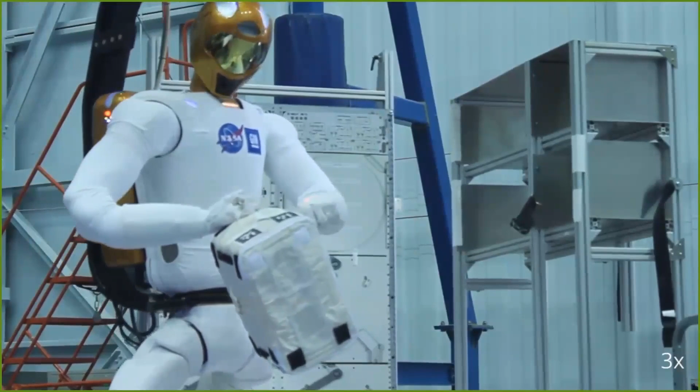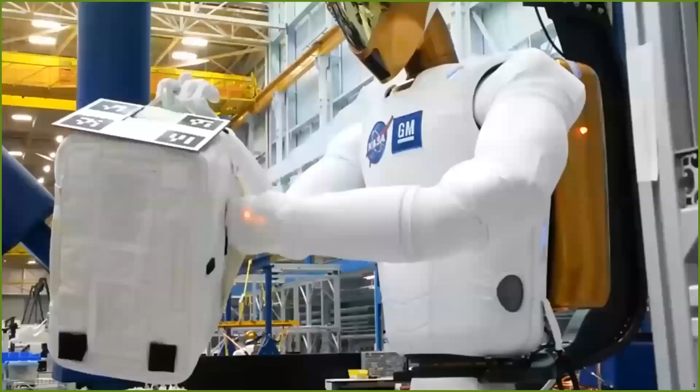So R2 is a dexterous humanoid-ish robot minus the legs that was designed as a prototype for these kinds of intravehicular operations, so inside the ISS. It can clamber across handrails, walk around, and theoretically it can mechanically do anything that you might want an astronaut to do. So R2 is also a really interesting case for motion planning because it is a high-dimensional system, it's humanoid, but we don't have to worry about gravity. So we can make a lot of simplifying geometric assumptions since we don't have to worry about things like dynamic stability.

Moreover, R2 lives in these really claustrophobic modules that are cluttered with all kinds of junk. There's obstacles all lying around. And say we had some tasks that we wanted R2 to accomplish, like maybe walk across the ISS, get from one side to the other. So you can see already that there's going to be a lot of challenges here in order to make that

happen. So the first step of this problem is figuring out how we can even go and then reach another handrail. And so watch carefully. So here you can see that finding a feasible motion for R2 here, which is constrained to not just keep its leg end effector grasped to the handrail, it's also constrained to keep its waist upright facing forward because it's actually kind of a nice proxy for momentum constraints.

The point of this is that solving for this problem requires solving for a motion plan in the presence of a manifold constraint. And so to this end, I'll be talking about that framework for manifold constraint sampling-based planning that Andreas talked about before. The way this framework works is that it decouples the way that these manifold constraints are actually handled from the planning, the search methodology, the way that some specific sampling-based planner explores or exploits the space. And this allows us to use specialized planners that are nice for high-dimensional systems, such as R2.

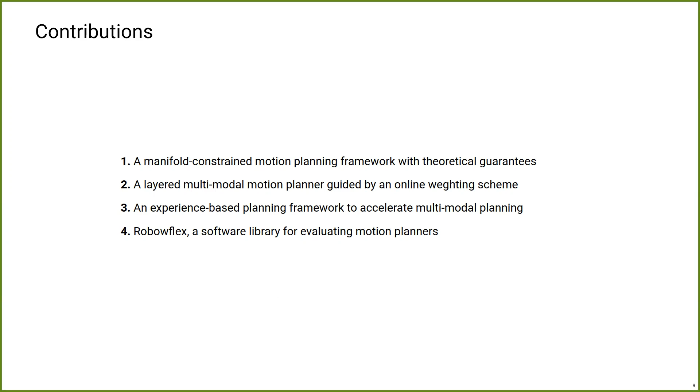So pause here if you guys have any questions. If not, I'll just keep on going. Okay.

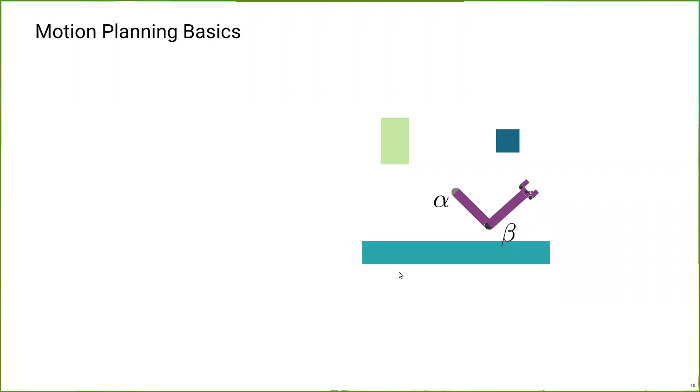So, I don't know how much I need to spend on this slide because you guys are all also motion planning experts. But I want to introduce this little robot because I'm going to be using it as an example throughout the talk. So, we have a simple little planar robot, got 2 joints, alpha, beta. This robot can be represented as a point in some configuration space over here on the left. Typically in sampling-based planning and planning in general, we just want to find some feasible trajectory. So, some curve inside the configuration space that corresponds to the valid motion of the robot.

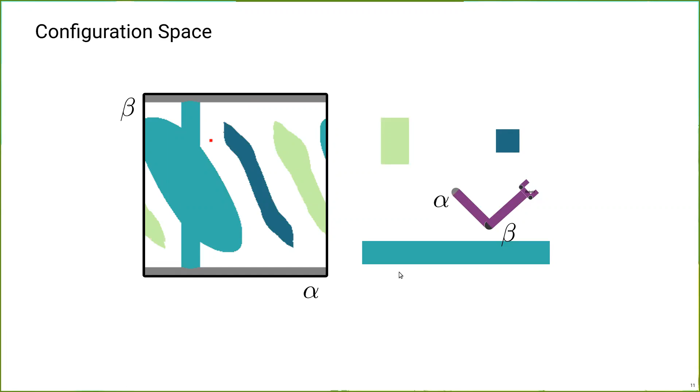But in the case that I'm talking about before, we're not just concerned with obstacle-free planning. We also want the robot to interact with the environment, have things like contacts and constraints on its motion. And so we want to address the difficulties that come from trying to apply sampling-based planning in this context.

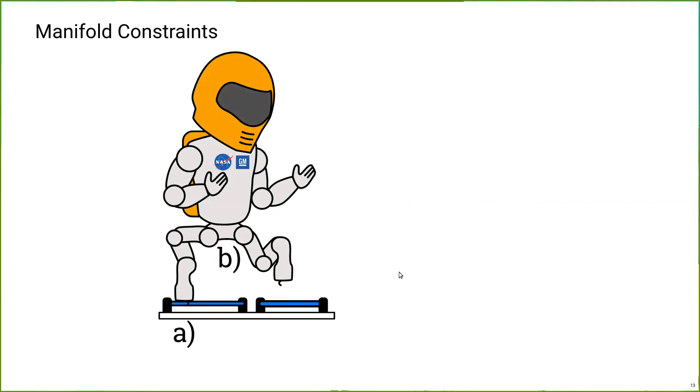So we model the interaction with the environment with these manifold constraints. So touching things, interacting with objects, maintaining contacts, all these things that are constant geometric relations in the workspace or the configuration space. All of these can be kind of encapsulated under the umbrella of manifold constraints. And so specifically, we model these as multivariate functions of the robot's configuration that we want to satisfy.

So here, in the example that I showed before, we have something like R2. Broadly, what this constraint might look like is that you have something that constrains the distance of the foot to some desired frame, and the waist of the robot maintaining precisely the angle you want. So you can see that when this constraint function evaluates to 0, this constraint is satisfied. And in practice, obviously there's some numerical tolerance, some small epsilon that you want to satisfy.

But the point of this is that when you actually define things mathematically as equal to 0 here, this actually induces a lower dimensional submanifold inside the configuration space. And the challenge this introduces is that this submanifold is of 0 volume with respect to the ambient configuration space, which gives challenges for the sampling procedure of finding valid configurations that satisfy this constraint, and also for making connections between different points in the space, such that free space motion might no longer actually lie upon this valid subspace.

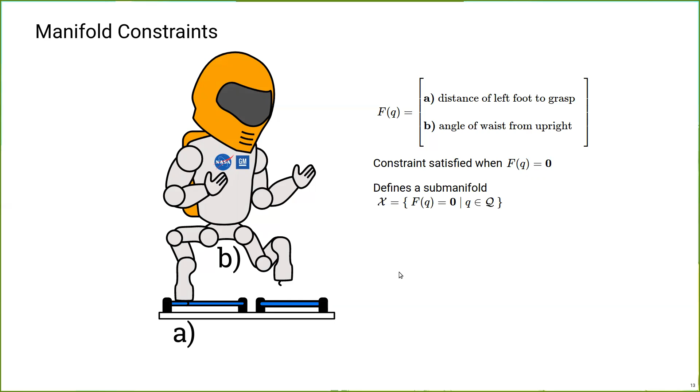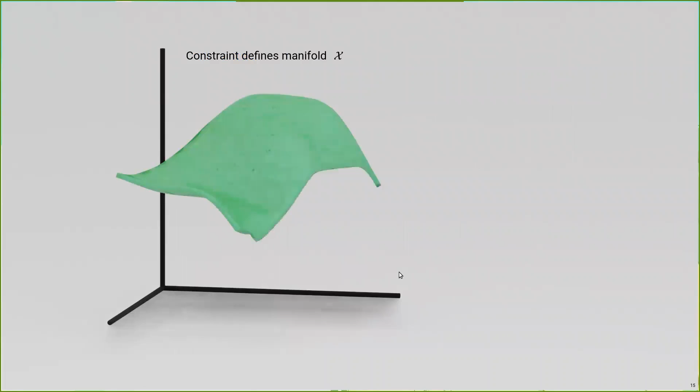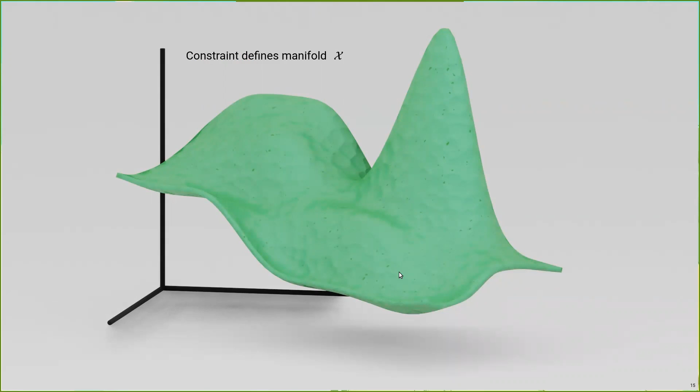To help visualize this, consider this really abstract representation of some arbitrary configuration space. This constraint function defines this lower dimensional manifold, like a curved sheet, some lower dimensional structure inside the space. And this structure is not just flat, like a linear subspace. It can curve and twist with respect to the configuration space, but not arbitrarily, because in order for it to be a manifold, there are some basic properties that it must satisfy. It has some continuity and differentiability. There are some nice properties that we can exploit in order to get guarantees out of the planner.

So therefore, the problem that we're looking at here is finding a path that lies inside this manifold. All right. So to make this concrete, taking... Zach, can I ask a question? Go for it. Why is it just an equality constraint and not an inequality constraint? Yeah, so I'm specifically looking at the case of the equality constraint because it has this nice mathematical property of defining the manifold. In the case of the inequality constraint, you can get volumes in the space, and some of the math doesn't quite work out for some of the methods.

So obviously, in practice, we're always looking at inequality constraints of some form, because we always have maybe some volume that we want or some tolerance and things like that. The way that I want to put this is that under the hood of this manifold constraint planning framework, there are two big methods that I'm using. There's a simpler projection-based method, which is basically doing numerical gradient descent to find satisfying configurations with respect to the constraint function. But there's also this more complicated atlas-based method, which is doing higher dimensional continuation structure building, where it's actually trying to approximate the underlying manifold of the space. And that kind of breaks down in the case of actual inequality constraints.

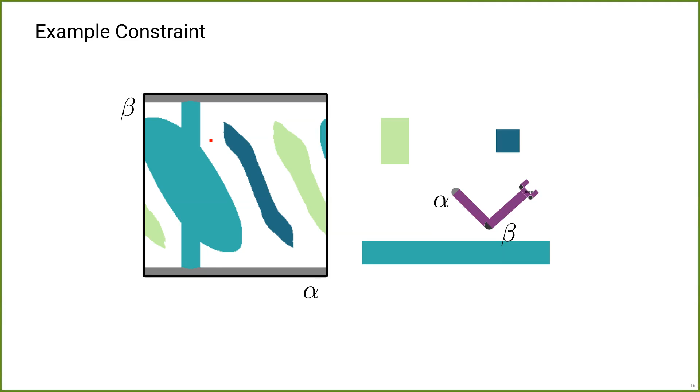So where was I? Oh yeah, example again. So here's that simple manipulator I showed before. Let's put a constraint on it. Say we want to have that tiny robot's end effector move along a line parallel to the y-axis here. You can see that that induces this submanifold in the configuration space shown on the left, visualized as this highlighted curve. It has a little bit of volume because this is visualizing the numerical tolerance with some small epsilon. Truly it's a one-dimensional object in the 2D configuration space, but we're considering it with respect to some tolerance here. And it's also nice for visualization. So this is the type of problem that we're considering.

And you can see here, in 2D maybe you could sample from that with enough trials, but as you move into higher and higher dimensional spaces, the volume of that is basically zero with respect to the space. It becomes impossible to search for using sampling-based methods.

So there's a ton of different work on how to solve motion planning problems under these manifold constraints. There's classical control methods, things like sequential convex optimization, trajectory optimization methods, which I'm sure you guys are all very familiar with. There's also workarounds in sampling-based planning, where if you have an end effector constraint, you can just plan for the end effector in space with respect to that constraint, then try and use something like IK to figure out the resulting trajectory.

Now, these work well for a lot of examples, but they all have the issue of being optimization-based approaches that are always going to approach some local minima, and they have trouble getting around the global problems that I'm really interested in, where there's a ton of clutter or things that you need a really robust search algorithm for.

Yeah, and so finally, to conclude this talk, this framework is available in OMPL, open source. Take a look. It's, I think, fairly well documented. I have a couple of tutorials and examples that walk through, and all the demos that I showed here are available as scripts that you can run yourself. So take a look if you ever have a planning problem with these kinds of constraints. Before moving on, I'm going to pause if you have anything you want to talk about.

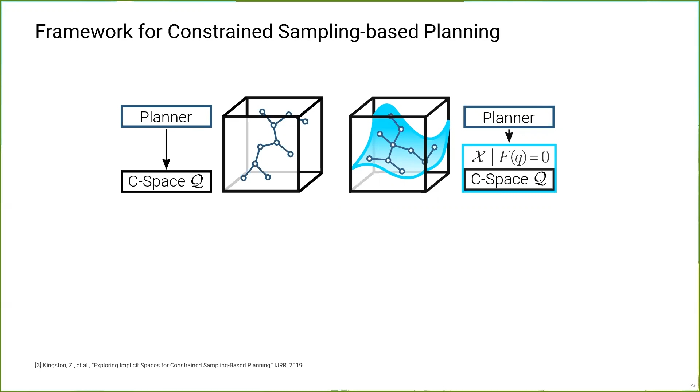Actually, yes, I'd have a question. Maybe I missed the main part. So how was this a general framework so that it could use any underlying planner inside? I just missed that. You had this one slide where you said that the configuration space. Yeah, I skimmed over a ton of the details here. But the component here is really just replacing the underlying.

If you take a look at this slide before, the underlying primitives, basically every operation that the planner uses that should call out to the space it's planning in. So things where you're trying to say, I'd like to connect 2 points in this space. That's now replaced not with a custom constraint solving thing that generates a geodesic on the manifold, but with a call to the abstract representation of the underlying configuration space. These planners are very modularly designed: an underlying implementation of RRT is just going to sample some point, extend some small distance along the underlying geodesic in the space that it's planning in. That's the point.

So a constraint sample, does this mean that you already want to have a sample on the constraint manifold? Yeah, so some planners, such as PRM, are going to require the sampler to be able to generate samples that exist on the manifold. But that's a problem in itself, right? A hard computational problem. Yes. So how do you solve that? Yeah, so there are two methods that are implemented for representations of the underlying space.

So there's one where it's just the kind of the bog stupid: you're taking a sample inside of the configuration space just randomly, and then you're using some numerical method in order to find or solve for a root of the constraint equation to project it, using something like gradient descent.

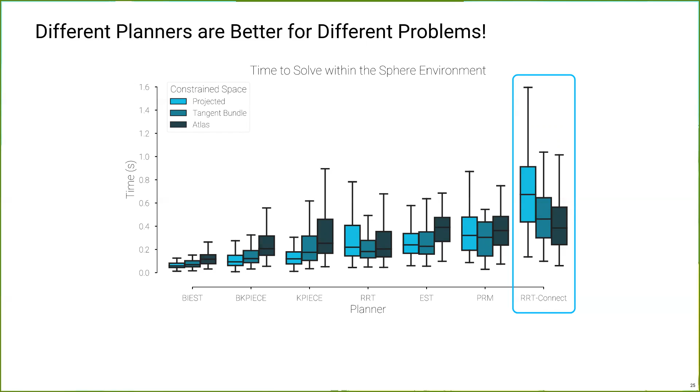And yeah, no problem. I have another question. Go for it. So for planners like EST or KPIECE, I think they also internally use some projection method in order to do the KD query efficiently. Yes. So can you kind of combine that projection with the manifold projection?

So I've definitely thought about it, because it'd be super neat to have, like I said, the KPIECE or EST coverage estimate projection that it's using be related to the structure that you're building with the atlas, like this piecewise linear decomposition. It has the same properties: you have these linear cells that are connected to each other. You could use something like that to inform the search.

Totally interesting. Haven't done anything with it, but yes, you're definitely right. It's something I thought about, but just never got around to. So. Okay, in the interest of time, I'm going to try and cruise along.

All right, so multimodal planning. We don't just have one manifold constraint, we have a ton. So consider R2 grasping that handrail again. A single manifold constraint here corresponds to a single specific grasp of a handrail. So in the context of multimodal planning, we're going to call that single manifold constraint a mode of the system.

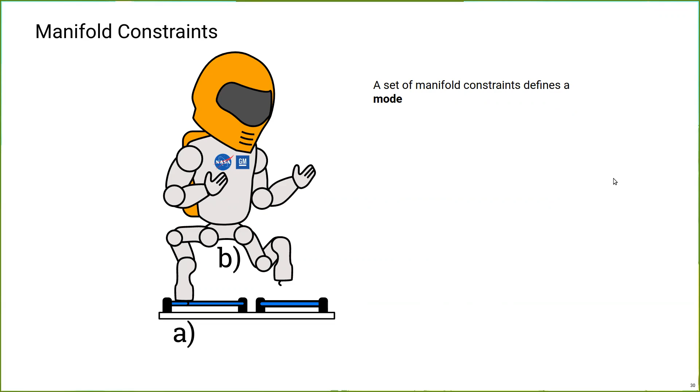And in the multimodal planning problem, we don't just have this one constraint and mode. We're talking about R2 that can grasp the handrail anywhere along the length of this handrail. What's also interesting is that each of these constraints is similar, and moreover, the way they're parameterized is such that you could think about that grasp location as a parameter that defines this family of constraints that could be imposed on the system.

And so the way that we're modeling this is that the collection of all these different grasps is modeled by this foliated manifold, which you can think of as a stack of related manifolds. It's like a book where every single page is a manifold, and the page number is that parameter from the transverse manifold, or that set of parameters. So we're going to use a foliated manifold as a mode family, as our collection of modes.

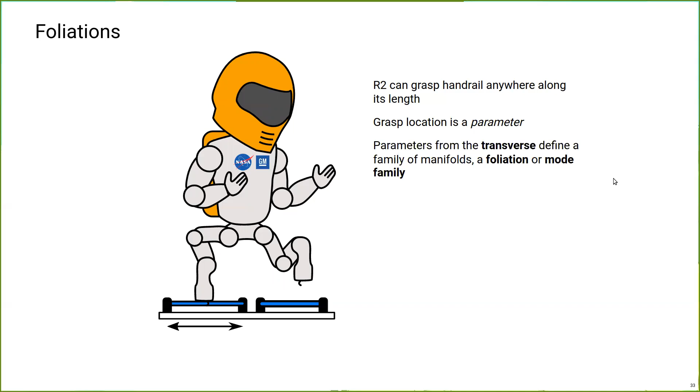So we have this parameterization where each parameter corresponds to a specific leaf manifold of that foliation, and every leaf manifold is defined by some constraint function, and that is a particular mode. Okay, so once again, visualizing this. Here's a really simple foliation in this abstract configuration space. It's got a one-dimensional transverse.

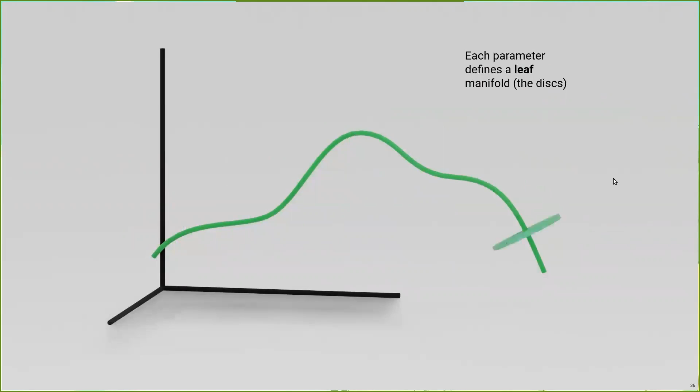So this is the line through space where every parameter on that transverse corresponds to some 2D leaf manifold. This is the 1D transverse. It's like the spine, a line parameterized from, say, 0 to 1, where 0 is one end and 1 is the other. You can see how this might map to a grasp on the handrail. And at every parameter on that transverse there's a leaf manifold, and here those leaf manifolds are these two-dimensional disks attached at every point.

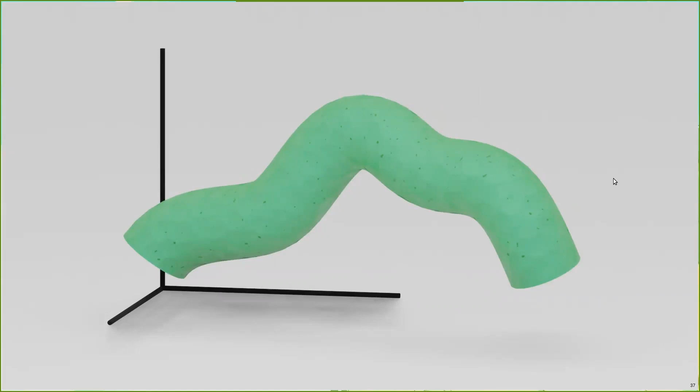So given that you have all these leaves, each of them disjoint, defined by the parameters on this transverse, altogether that creates the foliated manifold that we're considering. And this is the full set of every possible grasp that you could have on a specific handrail. Can I ask something, sorry to interrupt.

In the picture you showed before, the family of submanifolds together had finite volume. But now in the handrail example, you would have a 3-dimensional constraint if you fixed the grasp, and so the family of manifolds would still have 2 dimensions less, let's say, than the full configuration space, right? Yeah.

So, what's the way to put this? The foliated manifold is itself a manifold in the configuration space. But you can think of it as kind of the cross of these submanifolds. Taking once again a specific grasp constraint, that is itself some submanifold in the configuration space of lower dimensionality. There's also a cross dimension, which is this parameterization, so that's the grasp location.

Yeah, I guess my question was, in the handrail example, the volume of this combined manifold of all these grasps would still be 0, right?

It could be. Okay. Yes. Not necessarily. It's just depending on what the dimensionality of your constraint, like of a single mode or leaf is, and the dimensionality of your parameter space, because it doesn't necessarily have to be a one-dimensional parameter space. It doesn't even have to be Euclidean. I'm just doing these Euclidean lines for simplicity's sake. It could be really any other. The transverse parameter could be any other submanifold in the space.

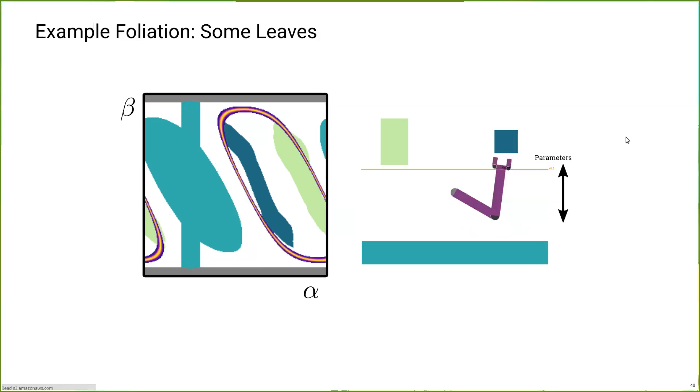Isn't that fun? Ugh, come on. Okay. There we go. Ugh, sorry about this, guys. Okay, I think it's working again. Can you guys see it? I can see something, but maybe you need to explain it. All right.

So this is basically a visualization of the foliation itself, where there's a mapping from the color in the configuration space to the color in the workspace. As the parameter increases, you can see the gradient of the color in the workspace corresponding to the line that the end effector was constrained on. That then maps to the identical color inside the configuration space here.

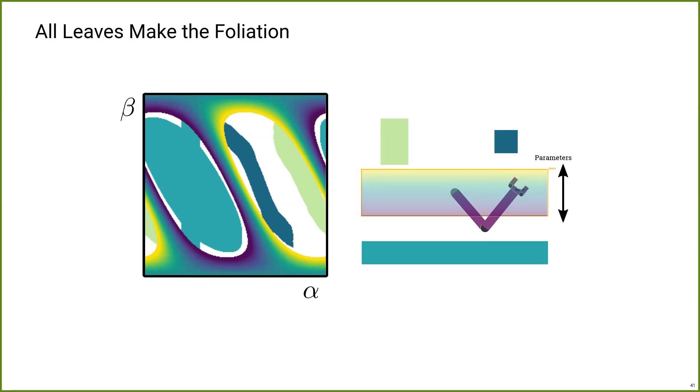And so this 2D structure here that has a little bit of volume is the union of all the different underlying constraint manifolds that exist for this specific foliation. This is actually what this would look like in this case. Is that clear for everybody? Yeah, definitely.

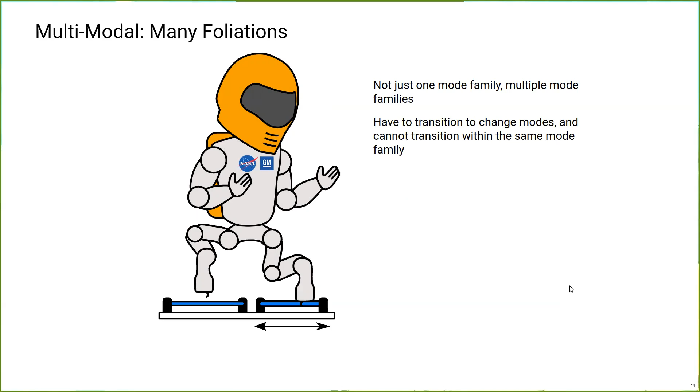Okay. So this is multimodal, not just a single mode family. We have multiple. Here, R2 can grab either handrail, so we can transition to that other handrail. We can't just stay inside that one mode family. We have to be able to explore the space in order to find a valid multimodal plan, finding transitions from a mode in one mode family to some other mode inside another mode family.

And also, as I was talking about before, if you want to switch between different modes inside the same mode family, you can't, because by definition these leaf manifolds are disjoint. You have to do some transition in between. This corresponds functionally to no in-hand grasps. If I want to grasp it, I have to re-grasp in some form.

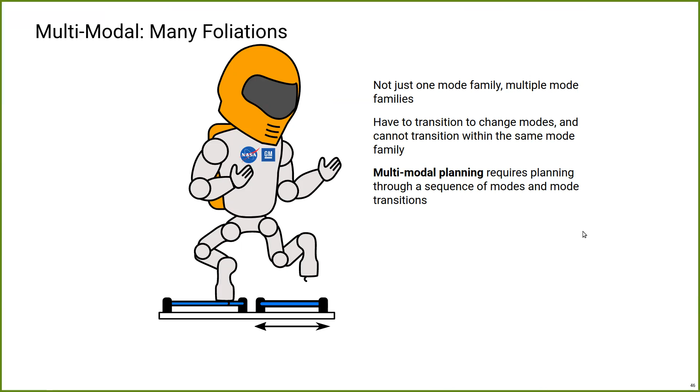I mean, obviously the issue with any of these types of problems where you have this structure is that this can grow combinatorially in size as you have more mode families and more modes of interaction inside your environment. And if you're familiar with something like PDDL modeling of these domains, there's a mapping from this transition graph to the implicit graph of all valid action transitions.

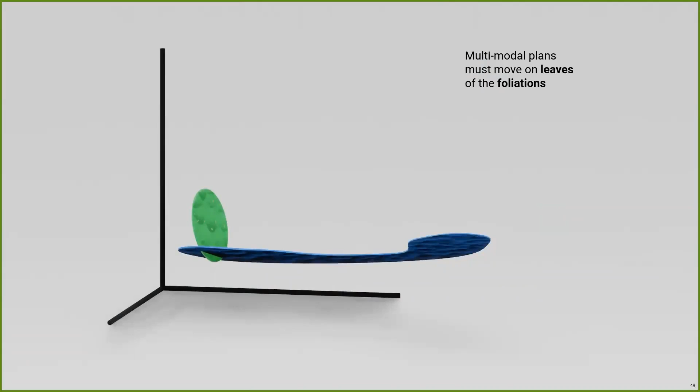So back to this abstract example, let's add another foliation in so we can talk about multimodal planning. We have to plan on one leaf at a time, and like I said, we can't move between leaves in the same foliation. These multimodal plans are going to move along leaves of a foliation, trying to transition to the intersection of leaves from different mode families, and then finding some path that exists on these different leaves on different mode families, transitioning in between them to eventually reach the goal. So that is the multimodal planning problem. That's what we're trying to solve. Any questions about this?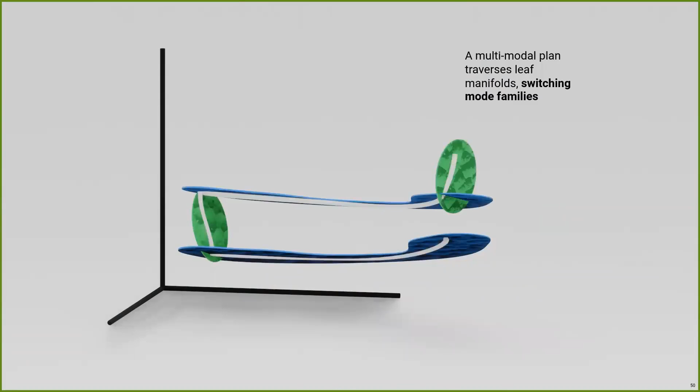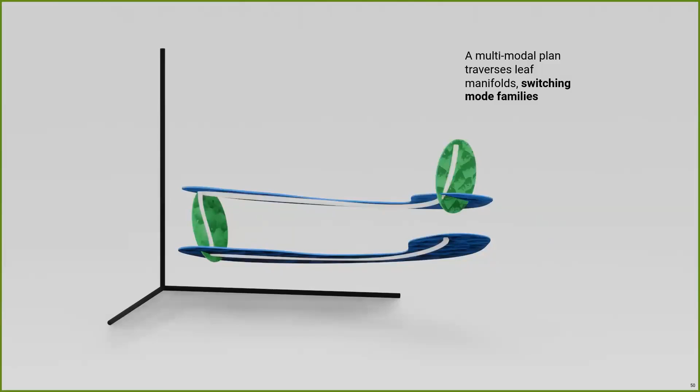So there's been a lot of work on solving problems with this multimodal structure, which I'm sure you're all very familiar with. You guys do a lot of work in this space of doing transitions, blah, blah, blah. But here I'm organizing them very broadly into 2 categories based on how each approach deals with the integration of the discrete element, in this case the transition graph, and how that relates to the continuous element, which is actually solving these motion planning problems.

So in broad strokes, I'm going to call task and motion planning approaches those that use a very explicit hierarchy between these layers. You typically have something that solves a discrete plan, some sequence of transitions, and then you try to resolve each of those transitions with motion planning in sequence. This allows them to solve really complex symbolic problems like block stacking, tabletop manipulation, rearrangement with a ton of objects, things like that.

But they're much harder pressed when faced with complex geometric issues, because it's really difficult for geometric insight to be fed back into the discrete planner that's actually generating these candidate transitions. So if you have a tabletop rearrangement problem, but there's a ton of obstacles around, it's typically very hard to have that information fed in some way that's understandable to the discrete planner. So that's a limitation of these approaches.

On the other hand, there are what I'm calling multimodal planners, or integrated task and motion planners, as it's used a couple times in the literature, because these are a more holistic approach of integrating the discrete and the continuous problems together. Now, the benefit of these is that they can handle a lot of the complex geometry issues you might find: getting through narrow passages, dealing with intricate handoffs and things that require a lot of geometric intuition for the problem. But they're typically not as efficient as task and motion planning approaches because they don't have the insight of the total symbolic structure that they need to explore.

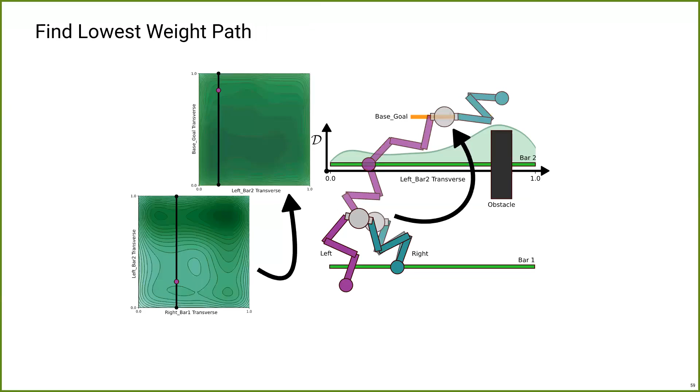If nobody else has questions, I noticed that it's 9:53 here. I don't know how long this meeting's supposed to run, but I should probably get cruising. Yeah, another 5 minutes would be good. All right, I'll try and be fast.

Okay, so for the experiments, I tested 3 variations of this algorithm. So we have uniform, which is the basic version of the algorithm. Basically, it's Hauser's work, but without offline information; it basically chooses a transition at random and tries to resolve that. We have a variant I call Dijkstra's, a version that only gives a sequence of mode families to transition to. It doesn't have any information about the parameters to try along this foliation. So this gives a sequence of these mode families, and the planner simply tries to transition to any mode from that mode family. It doesn't care about the specific parameterization.

And finally, we have augmented, which is all the bells and whistles. So it provides a sequence not just of these mode families, but also a specific segment of parameters to attempt to connect to. So it could say, hey, go to bar 2 with your left arm and try to grab it somewhere between the parameters 0.5, 0.6 or something like that. So it gives that sequence.

So how does it perform? Here, this is this monkey robot climbing across an increasing sequence of bars. So we're increasing the total horizon of the plan that we need to resolve. Here you can see that in this case, Dijkstra's actually outperforms the bells and whistles method because the parameterization of the bar isn't important. But it still outperforms the uniform method because providing the sequence of what things you need to try helps it out.

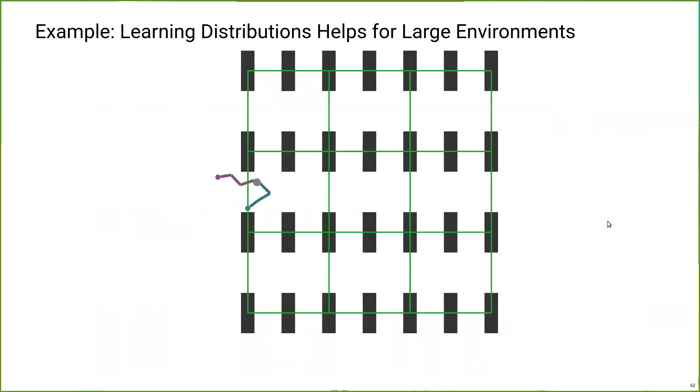Now, when the parameterization is important, or where there's a ton of obstacles, learning these weight distributions is tremendously helpful. Here you can see there's a ton of obstacles and a lot of challenging motion planning problems between grabbing each subsequent bar. And you can see that the weights learned by our method, the augmented approach, really help the exploration of the planner to successful transitions.

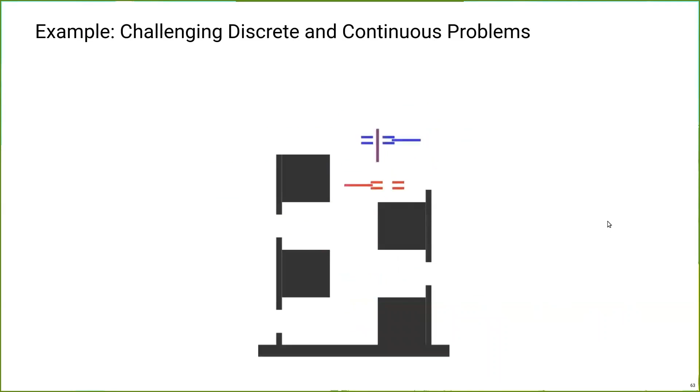And finally, this method doesn't just work for monkey robots. It also works for any system you can model with manifold constraints. So here you can see this complicated handoff scenario that requires grasp readjustment between each subsequent pass, complex geometric reasoning. It's really similar to a lot of task and motion planning problems, but our approach is still able to outperform baseline methods here. This weight information is important.

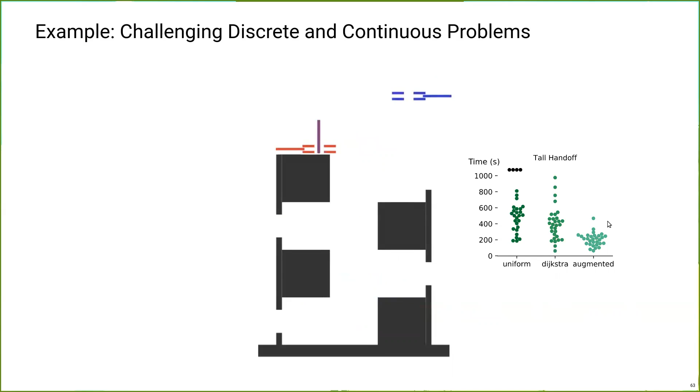So in total, I presented this multimodal planning algorithm. It can solve what I'm going to call these complex manipulation tasks. It leverages that manifold constraint planning framework so that we can do arbitrary systems. And the information that's learned online along with this discrete lead that's generated helps it solve both long horizon problems and complex geometric problems more efficiently. Okay, before the last section of the talk, I'll also pause here for some questions.

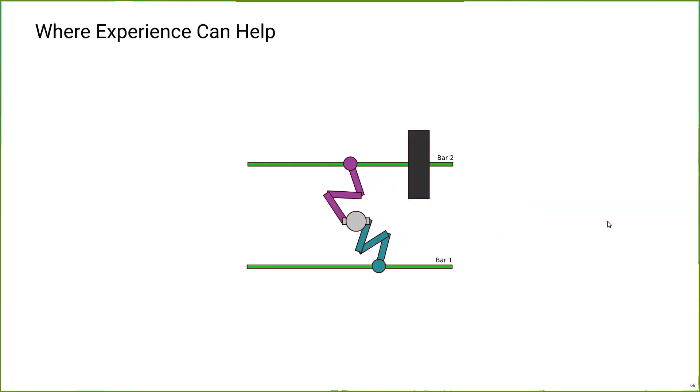Okay, so finally, one of the main conceits of this approach is that we're going to be trying a ton of different individual manifold constrained motion planning queries from one mode family, because that's how we're getting our weight information. And so these queries are all going to be very similar to each other. Take the monkey example: there's a couple of different problems that are all very similar, with just slight variations in the source and destination transverse parameter. You'd think that solving one of these problems gives insight into how to solve the other.

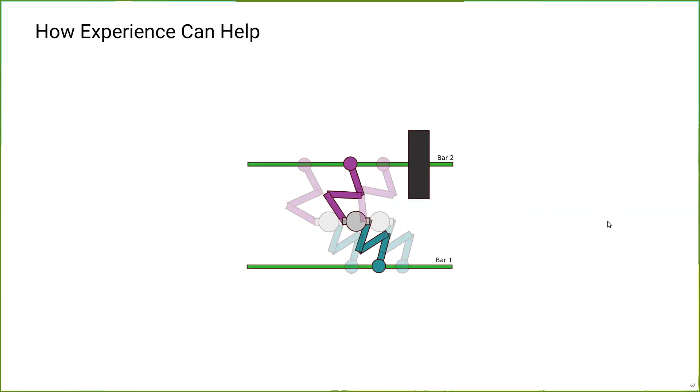One of the wrenches in the works here is that a problem that we're solving from one mode family lies on that underlying leaf manifold. And the solution paths from one are not necessarily going to apply to the other for any arbitrary foliation or constraint. And so the goal of this work was to figure out if we could have the planner learn from experiences such that if you have a plan from one leaf manifold, you could transfer that experience to another close by leaf manifold.

Broadly, the two types of experience-based methods that have been applied for multimodal planners, and let's say task motion planners in general, are ways of improving the underlying motion planning search. So if you recall, Konstantinos gave a talk at your group, I think a couple weeks ago at this point. His methods all deal with how to do things like planning under experience. I'm not going to really get into the details here, but the important thing is that as far as I'm aware, there's not any method in the literature that explicitly handles the case of manifold constrained experience-based planning.

Now, the other thing that you can do here is actually learn to bias your search based on what transitions you think are going to be good, based on things like human demonstrations or prior successful plans, but these don't necessarily improve the capabilities of the underlying motion planner. These just accelerate the discrete search element by providing good a priori guesses.

So the contribution of this work, which just got accepted to IROS, is that we're going to propose a novel experience-based approach for planning under manifold constraints, explicitly those that are drawn from these foliated manifolds. This framework can be used in any situation where you have multiple planning problems that are being constrained by leaves from that same foliation. It enables that experience to be transferred from one leaf to another leaf from that same foliation. And we use this in the context of the multimodal planner in order to accelerate planning in total, as the multimodal planner is going to, like I said, try all these different queries all from the same mode family.

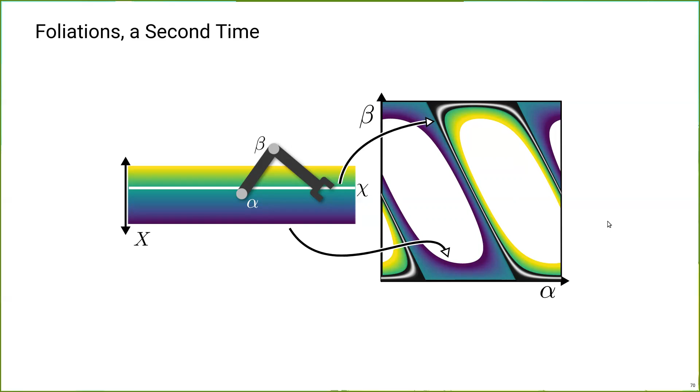Okay, so how's it work? First, here's that same two-link manipulator that I've shown before, maybe with a different color palette. Here you can see the foliation, and the manipulator mapping into the configuration space. Now we have this set of parameters X, and here there's one leaf manifold corresponding to the parameterization chi. What we're doing is building a sparse roadmap inside the domain of the foliation shown here. You can see that there are edges and nodes corresponding to their foliation parameter values, with a color palette that is consistent between the two.

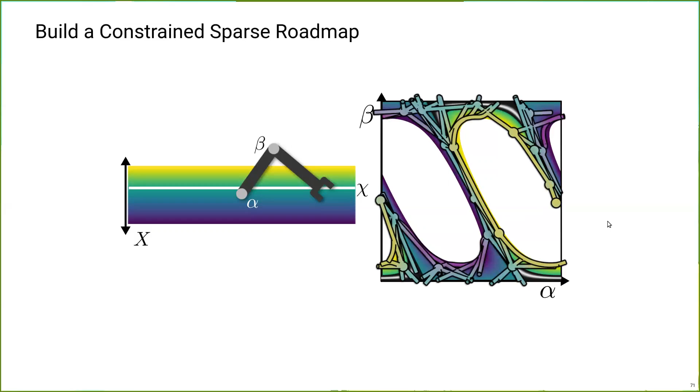Now this roadmap's not just within the configuration space. Like I said, the novelty of this method is the introduction of this augmented space, which includes not only the configuration parameters, but the foliation parameters as well. So here's that same roadmap, now rotating it out. It's the composite of the 2D configuration space across this 1D parameter space in this case. You can see how we're building this sparse roadmap on this submanifold inside this augmented space. Here you can see the leaf manifold parameterized by chi, a slice that intersects through this augmented manifold. Also, the edges aren't straight lines because they're geodesics on the manifold. Just want to make sure that's clear if that's confusing to anybody.

So the goal of this work is we somehow produce this structure and then use this structure in order to inform search. So how's that work? Here's a sketch. The axis on the left is a really abstract representation. We have the set of parameters for the transverse manifold X. Here we have two plans, one generated on leaf 1, another generated on leaf 2. We insert these plans into this augmented space and build this sparse roadmap according to, I don't want to get into the details here, the SPARS algorithm, if you're familiar with it.

What's nice about this is it has guaranteed sparseness and near optimality properties. So as we're building these connections, we're only considering the important connections that capture connectivity of the space. We don't add anything unnecessarily. There's a fixed point at which the sparse roadmap will consider itself complete, and we don't need to insert any more information.

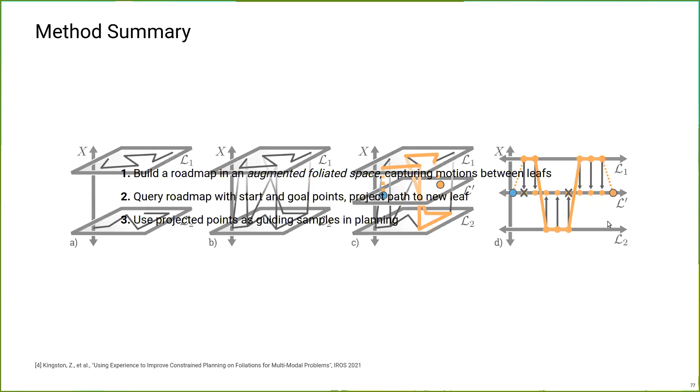And so the way this works is that, under the hood, when you query for a sample with some probability, you try to query the underlying roadmap using some goal configuration that you have, get a path out from the roadmap, squish it down, grab those as samples, accelerate search. I should have switched this slide as I talked about that.

Anyway, so in summary, like I said, you're building this sparse roadmap in this augmented space. You query this roadmap every time you have a new planning query, and you use the paths from this roadmap, project them down to the new leaf, and use them to guide search as samples.

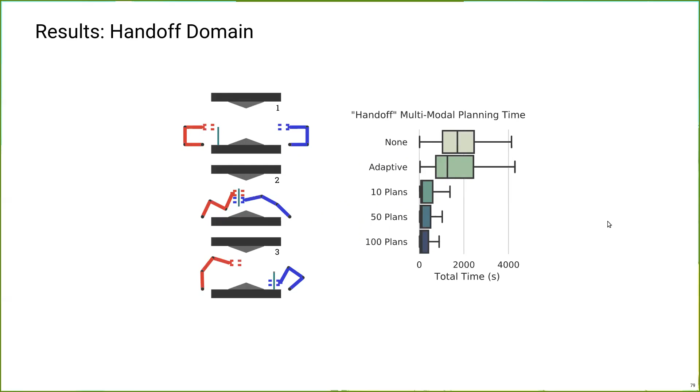And then here's an example with a similar kind of handoff environment. So here we're transferring the stick over, and that little spike obstacle can move up and down fully so that the spike's protruding and can rotate by 20 degrees or something like that. Same kind of experimental setup. But you can see here that, once again, adding a small amount of data dramatically speeds up the performance of the planner.

Okay, so to wrap this up, reusing experience in the constrained planning context is now possible, and using that experience dramatically accelerates planning in these complex geometric examples. So it's efficient and can be used online. Yeah, that's that. So I'll stop here for some questions.

So you mentioned that every time you moved around the obstacles, but the total number of obstacles stays the same. Yes, the total number of obstacles in this case stays the same. So what would happen, or is it even possible to change the environment more significantly by removing an obstacle or adding one? Yes, so that is a limitation of these sparse roadmap methods,

because what these roadmap methods really do is they kind of learn the invariance in the space. So they really leverage, like I said, the invariant structure of the planning problem. So when you have dramatic changes in the obstacles or the environment, the experience that the sparse roadmap is able to learn becomes less and less relevant for the problem. And that's a known limitation of these kinds of approaches. So once again, to hype up Konstantinos from a couple of weeks ago, his approach is directly designed around trying to address those kinds of limitations.

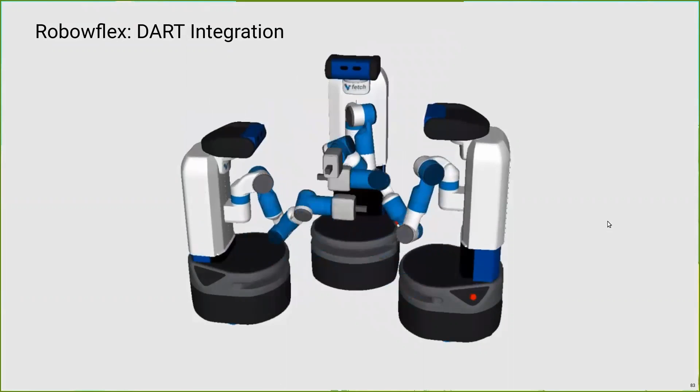And some examples. So I have this extension that uses DART, so you can do multi-robot motion planning a lot easier. You can copy and paste a bunch of different systems around. And also this really nice Blender visualization module that makes it easy to make really crisp visuals of motion plans. And that's what I used to generate that R2 figure at the beginning of the talk.

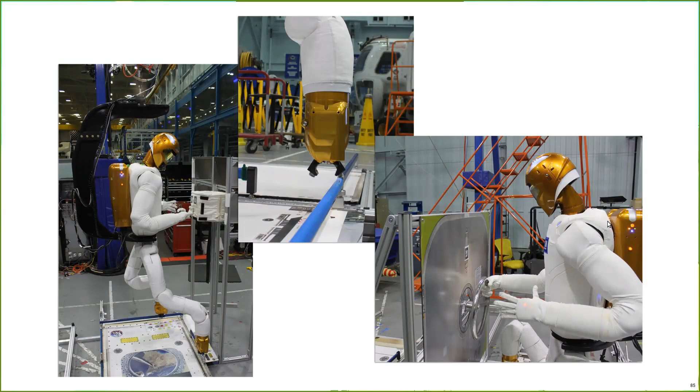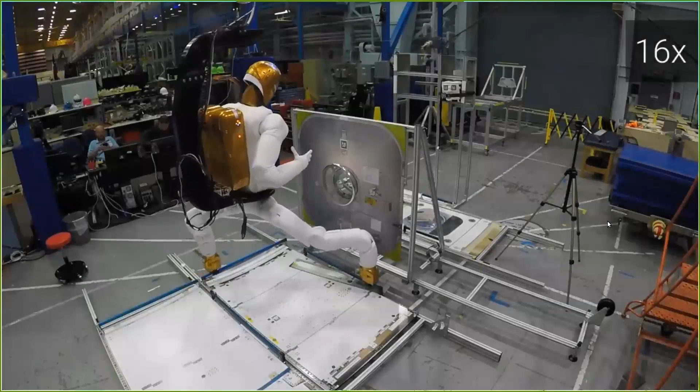Now, back to kind of the final motivating example. The end goal of this is to eventually apply multimodal planning to R2, to have it solve some complex manipulation tasks autonomously. So here's a couple of examples of tasks we'd like R2 to do. Turning valves, grasping these handrails, manipulating these bags out of these racks. And for example, here's a video that was taken a while ago with R2 climbing across this kind of mock-up ISS down here in Houston.

You can kind of see that there's this big gimbal thing on the back. This is like a zero gravity sim where it's actually offloading the weight of the robot, so you can have it move around kind of like it was in microgravity. But anyway, the point of this is you can see R2 was doing some interesting stuff like moving the torso with both feet attached to handrails, so doing this kind of in-place motion. It just turned the handrail here. It's about to slide this door along this linear rail.

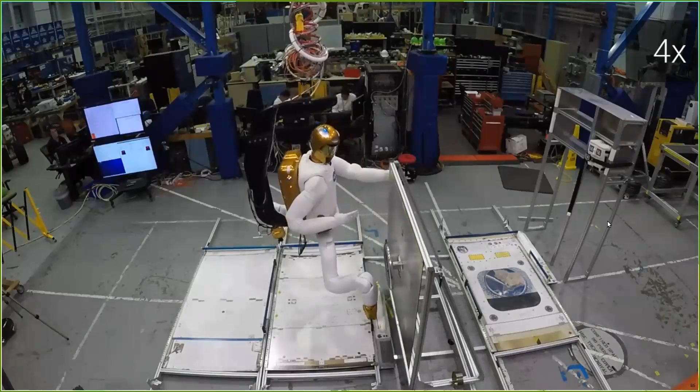Now, the thing here is that all of these were kind of a pre-specified sequence of motion plans. It's still using that underlying manifold constraint planning framework, but it's not doing the reasoning of what things to do autonomously. The hope was that I could this summer apply the multimodal stuff to the Robonaut, but because of COVID I obviously wasn't able to go down there, so that dream's left unresolved right now. But in the future, I really hope to be able to show this off, actually applying it to R2 and solving these kinds of problems autonomously. And so it just manipulates the bag later.

Anyway, so in conclusion, what I've talked about here is this general framework for manifold constrained motion planning. It gives you theoretical guarantees. It's available open source. And this framework then is leveraged by this multimodal planner that has this online search. It has this synergy between the layers, so that you have informed discrete search that informs the continuous layer. And then eventually an augmentation of that such that you can have this experience-based acceleration of the underlying motion plan so that you can solve these kinds of problems faster.

And in the future, like I said, I want to apply these kinds of approaches to real robots, R2, expand the transition graph so it can handle things like PDDL domains and LTL specifications of tasks. And also get into the theory a little bit more and talk about what guarantees we can get for multimodal planning in general.